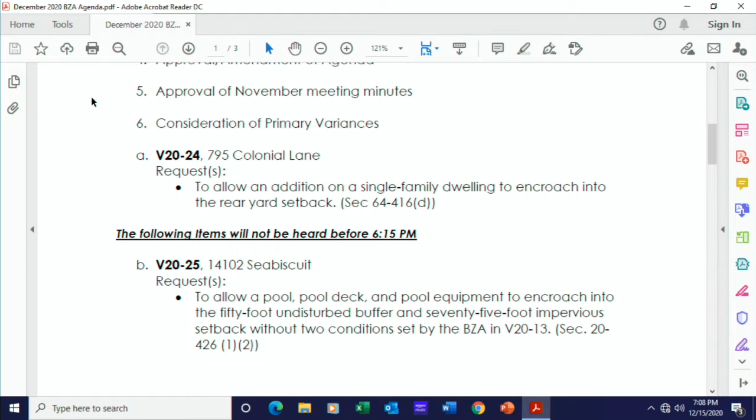The applicant is proposing an addition to the existing house that would encroach the rear setback as shown in Exhibit B. The house is sitting on the highest level of the lot. Moreover, the property is sloped and wooded on both sides. Therefore, the applicant is requesting a variance to encroach into rear yard setback.

Design Review Board met on November 3rd, 2020 and had the following comments: recommend to approve the variance.

Staff response, part one. The relief would not offend the spirit of the ordinance because the shape of this property has caused unusual setbacks. The rear setback could be equal to the side setback since it is technically on the side of the house, and the front is curved.

Part two. Because of the topography, the trees, and the previously approved setbacks, the property owner is facing this challenge. The strict application of the ordinance would create unnecessary hardship. Therefore, it is staff's opinion that relief shall be granted.

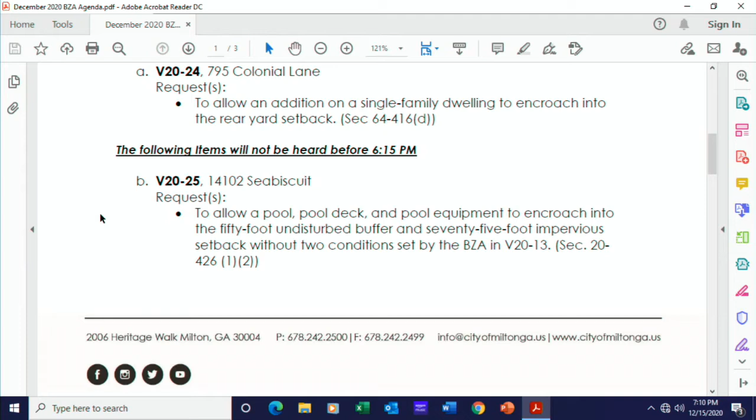Part three. Relief, if granted, would not cause substantial detriment to the public good because there is a sufficient buffer between the neighboring houses. Part four. No harm to public safety and health is likely because of the encroachment into the rear setback. Staff recommends approval of the variance request as shown on the site plan.

Are there any questions for staff?

I have one question clarifying this unusually shaped property. In the determination of front yard, side yard, and rear yard, as noted in the presentation, can you elaborate on how the legal interpretation has gotten us to this point versus what appears to be a side yard being considered as a rear yard?

Well, this plat was done and issued prior to the incorporation of the city, so we didn't have review of it. Just looking at it from a practical standpoint, it appears to be a triangular type lot.

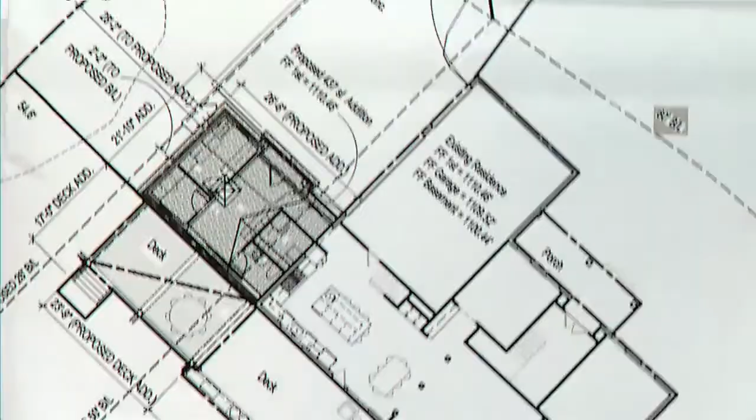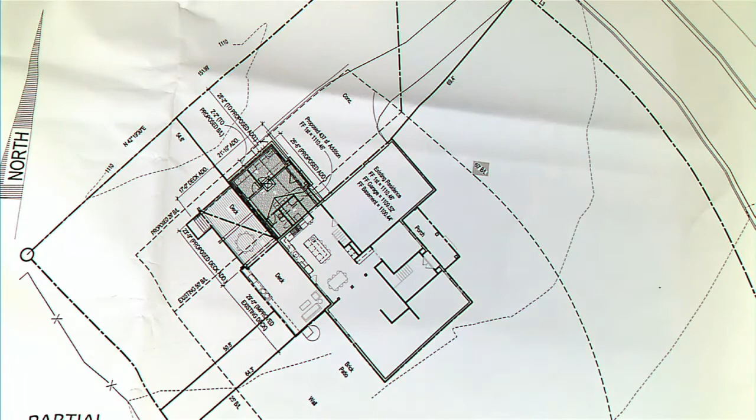Okay, so the shaded area would be the addition that you're looking at, and it also shows on there the existing 50-foot setback, and then the proposed 25 if we would determine this to be a side yard. So the addition would be within that 25-foot, outside of the 25-foot side yard. Correct.

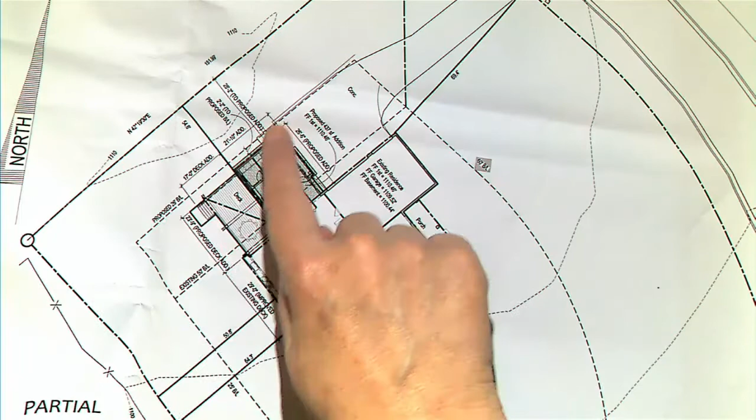Okay, and then can we also show the elevations in terms of what the structure is intended to look like? Front first. You might want to flip it, it's upside down to us.

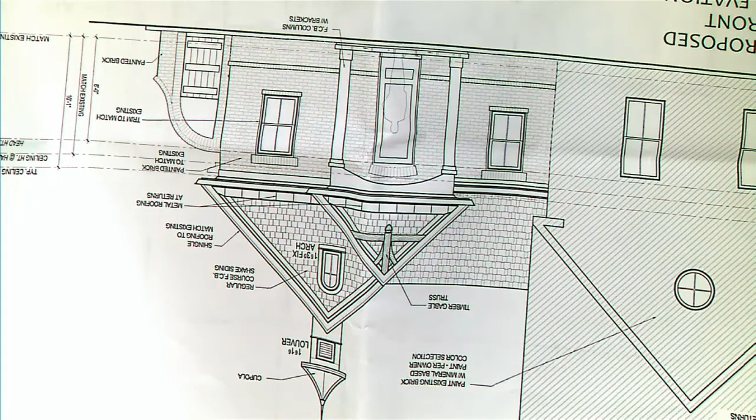Okay, so the addition is designed to match the existing house and look like it was contiguous to the original home. Correct.

Is there any concern with having a condition attached to this specific site plan as well as the elevation plans? Is this your final product that you're looking at? This is our final product. Okay.

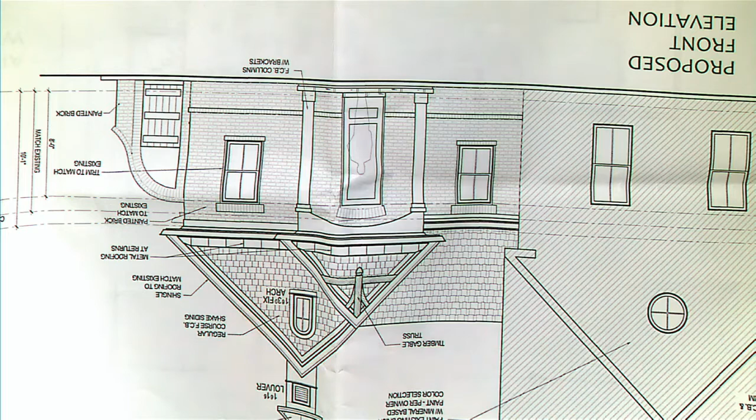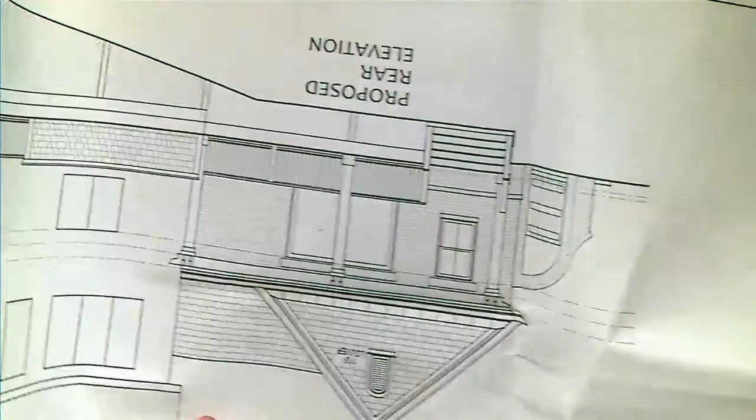And I think there's a side view too. Okay, and is there a side view as well, I believe?

Only for the neighbor's purpose. I think it's on A2. The right side is.

Robin, can you rotate those 180 degrees? 180 degrees.

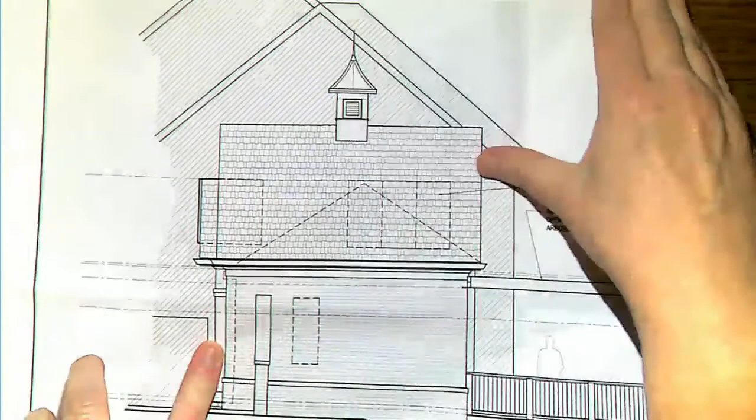Can you zoom just a little bit? So this would be the side view from the adjacent neighbor. Correct, although they wouldn't be able to see it because there's a bunch of trees.

Understood. Anything else you'd like to share regarding your application? Nope, that's it. Okay, so what we'll do is we'll move to a public comment period where folks can speak in favor or against this application, and you'll have a chance to make a closing comment. We may have additional questions.

You can go ahead and have a seat. If there's anyone online that's interested in speaking or here in person, for those online, if you're on Zoom, click the icon labeled Participants at the bottom of your screen, then click Raise Your Hand if you're interested in speaking. If there's anyone present, we'll have an equal amount of time for those speaking in favor or against. Is there anyone wishing to speak in favor, here or online?

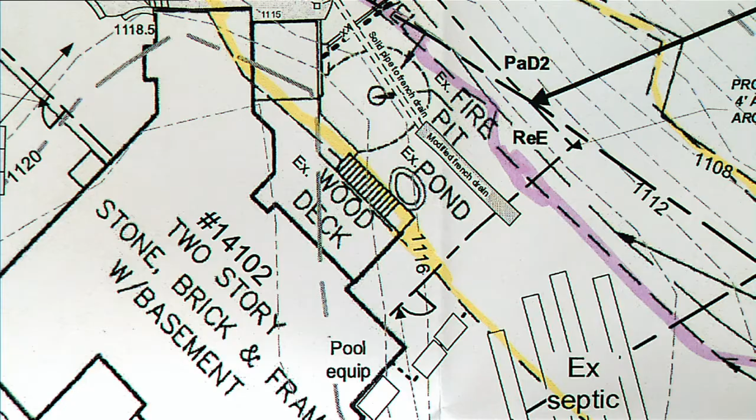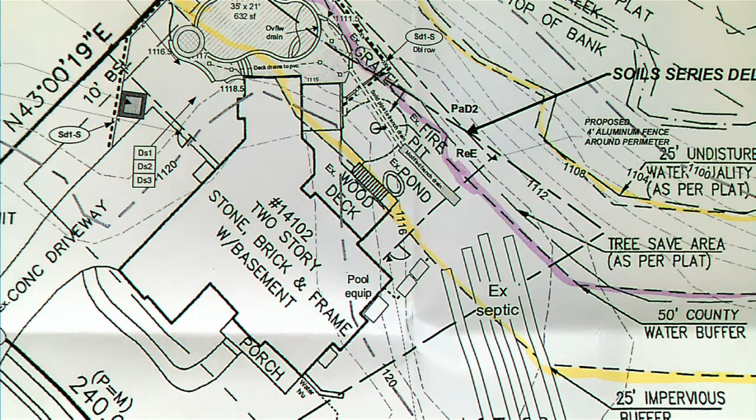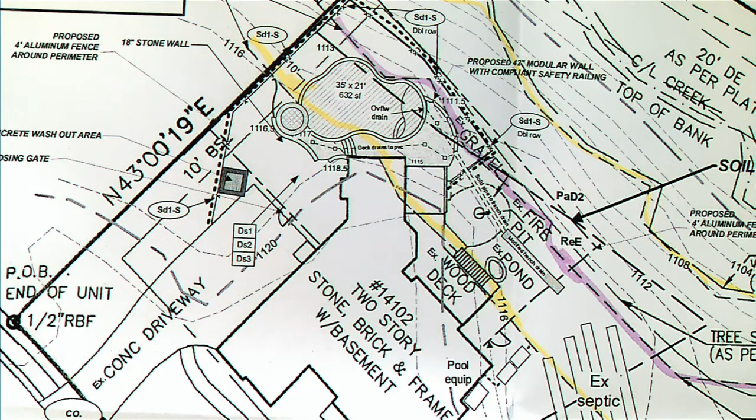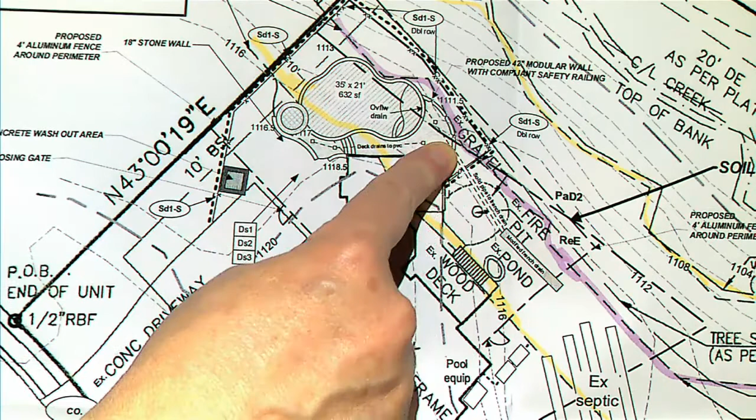We worked on an alternative solution to mitigate the water from the impervious pavers and the deck runoff in the pool. Rather than have the concerns that I had before with pervious pavers and the dry wells, we were able to put in a modified French drain to do the work of those two other stipulations. As long as you approve it, that's the solution I'd like to go with.

Understood. So the footprint of the pool and the pool deck hasn't changed. The mitigation option for any runoff, because you're abutting a stream, is what changed. Correct. The purple line shown on this drawing is the 50-foot buffer, which you're building up near, as you were originally. Correct.

Are there any questions for the applicant?

Do you have anything further to add? And before I move to public comment, you will have a closing opportunity if needed. Good, if you're good. Okay.

If you have a seat, see if there's any public that's interested in commenting.

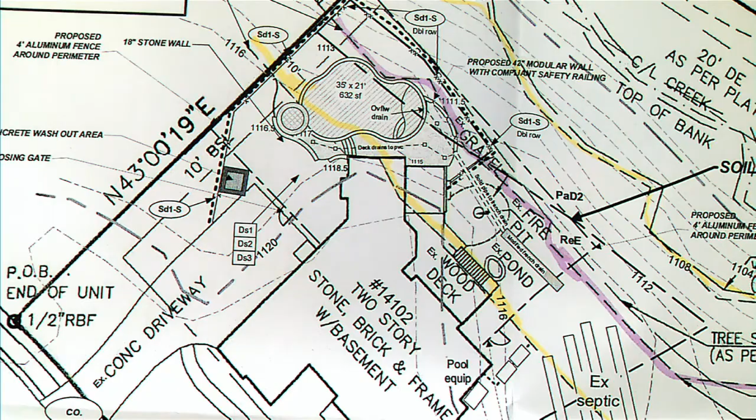Of course, if there's anyone here present that wishes to speak in favor, I will start with in favor.

Robin, do you have any interest online? Nope. Okay. Hearing and seeing no further interest in public comment for support of this application, is there anyone here wishing to speak in opposition or online?

Okay, hearing and seeing no interest in public comment for or against, Mr. Wilbrock, you have an opportunity to make a closing comment. Do we have any closing questions for the applicant?

I guess I would just like to get some further clarification on the pervious pavers. Why would we take that out of the conditions variance? Is that a question for staff or for the applicant?

I guess staff. Based upon the resubmittal and review by the plan review engineer, the proposed alternative basically compensates for both the dry well and the pervious pavers, or the grass between the pavers, because this mechanism will take any kind of pool water that comes over, as well as rain and drainage.

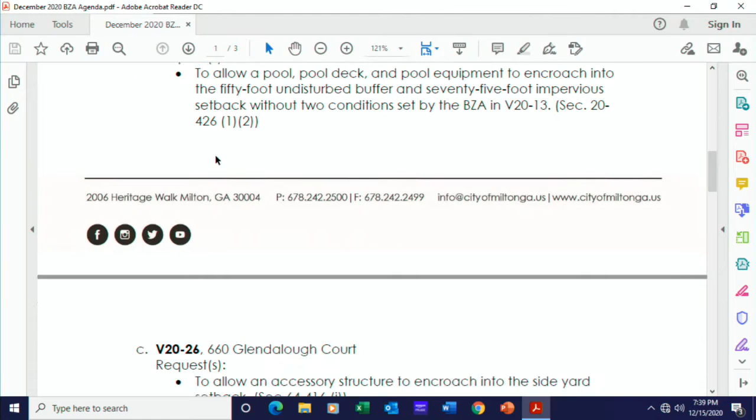The next item on our agenda is V20-26, 660 Glendalough Court. Please present. V20-26, 660 Glendalough Court requested variances to allow addition of an accessory structure to encroach into the side yard setback, section 64-416I.

The site is a 1.745 acre lot on the west side of Glendalough Court in the Enniskerry subdivision. This property is zoned AG1 and is located in the rural Milton Overlay District. The final plat for the property was approved in 1992.

As per section 64-416C1, a 25-foot side setback is shown for the lot.

On the north side of the subject is a piece of land that serves as the road frontage for the house located across the lake, which is not being utilized by that owner.

The applicant wants to build an accessory structure on the property to be used as a garage, as shown in Exhibit A. The existing driveway would be used to access the new two-car garage. However, the structure is encroaching into the north side setback by 10 feet. Therefore, the applicant is requesting a variance.

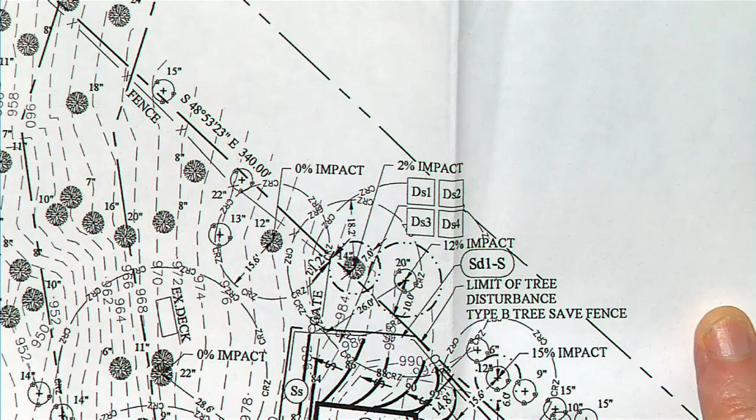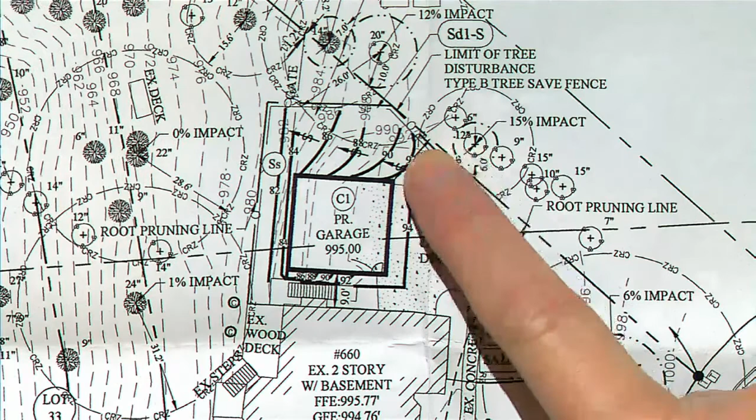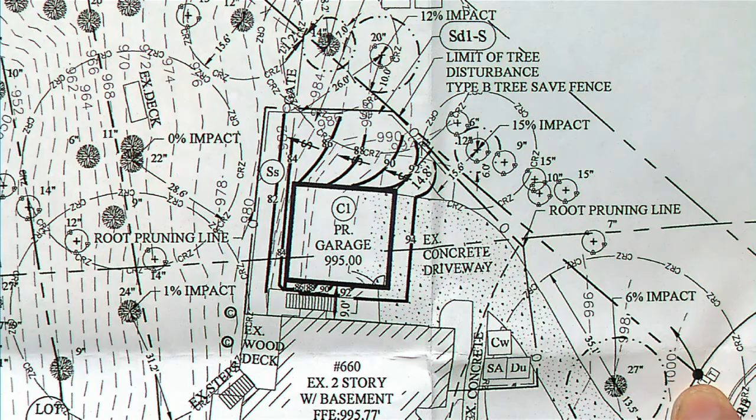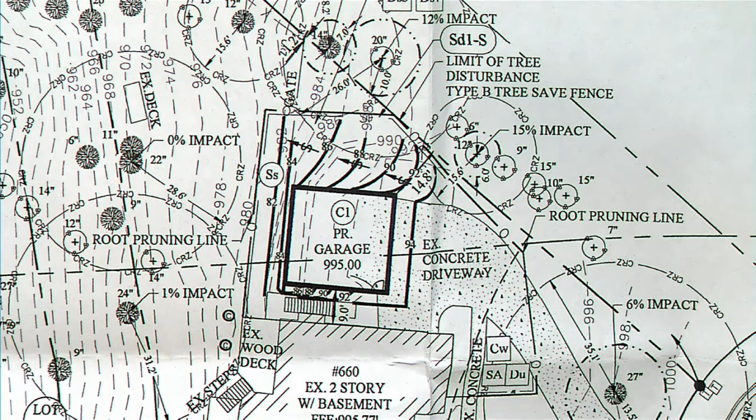I think, as we did with prior cases, we'll want to show some of the elevations of this project as well. I'd ask the applicant to please come forward, state your name and address for the record.

Estes Barker, 660 Glendalough Court, and Jennifer Barker. What can you share about your project, what you're looking to do?

We're wanting to build a garage, and due to the pie-shaped nature of our lot and the severe slope going down to the lake, we need the variance because of the strip of land between our two properties. If that strip of land was split evenly, or even two-thirds to our neighbor and one-third to us, we wouldn't need a variance, but it's there.

The owner of the strip is here tonight in favor of our project. We've tried to set it back as far as we can. We're already incurring quite a bit of additional expense because of the slope.

So it's going to require that much more support structure. It looks like you've got a partial basement on the backside, half the garage, because of the topography. You're going to utilize that as storage? Yeah, lawnmower, that kind of thing. There are quite a few elevations, which I think Robin's going to start showing here next.

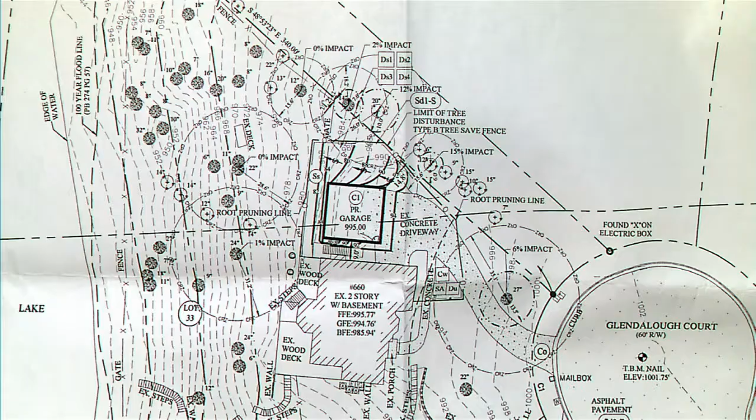The clarification regarding the elevations, I think we can put those up. Thank you for having these provided for us. Do the building materials and the design match the existing house? Correct.

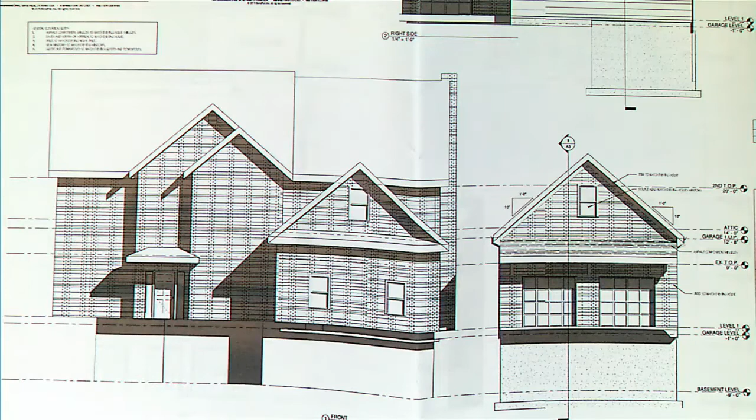I'd ask you to address the use of this addition. You mentioned it as a garage. There's no living heated space, just a garage. Well, you're allowed to have heated space, just not allowed to have living space in terms of an accessory.

It looks like you have a lift going in here, some sort of hobby. Well, I do have an antique Jeep I need to store. Not a Mustang? That's what I see pictured here. We have one of those, but it's not at our house. I'm a car guy, so - a '66 convertible. All right.

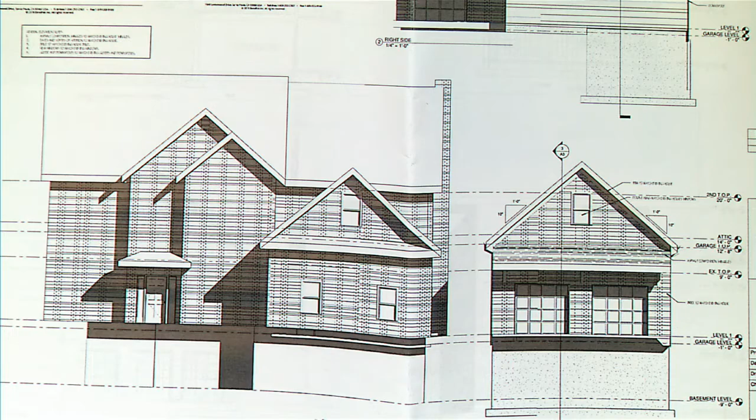Does anyone else have questions for the applicant regarding their project? Can you clarify if the two structures are going to be connected by a breezeway, or are they completely separate? Separate, no connection.

And it looks like you're repurposing part of your existing garage for personal expansion of the home? Both of our mothers have dementia, so at some point, one of them, if not both, will be with us.

Robin, do we have the letter of support, or is this your adjacent neighbor? Neighbor can come up to speak. Are they planning on coming to speak? Okay, then that's fine. I'll call public comment here in a minute. So you've seen the process. I'll ask for public comment. You'll have a chance to make a closing comment, and we may have final questions for you. So with that, you can have a seat for now.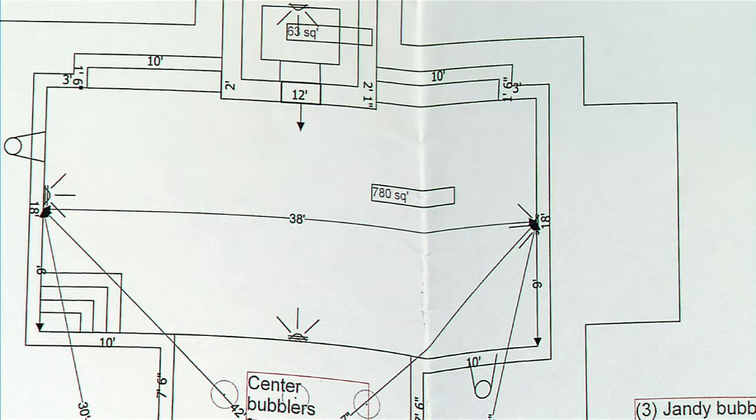In terms of the numbers and percentages, which is probably the most important part we have to figure out: the current home occupies 19.2%. The initial proposal submitted to the city, before the panel here, was 25.22%. After we met with the city, we trimmed it down to 23.6%. That's the plan in front of you now. My understanding of the laws in Milton is that houses fronting major roads like Providence were reduced from 25% to 20%.

It went the opposite way. Everybody was under the 20% rule when it was initially adopted, and then a year and a half or so later, we amended the rules so any private roads were allowed 25%. So everybody got moved up except if you were abutting a major road.

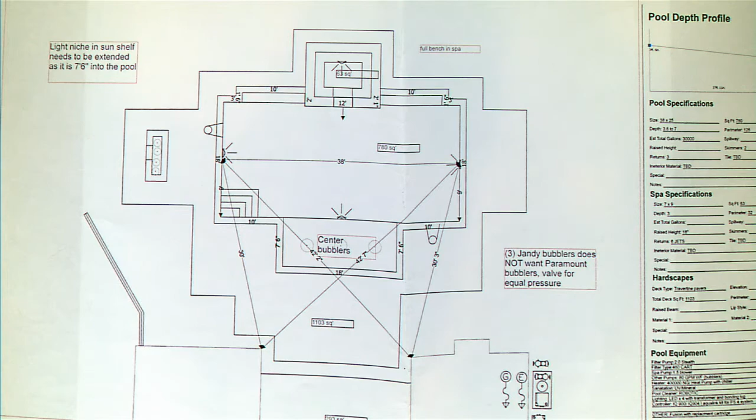We purchased our house in December of 2017. It came with a plan that I believe, or was explained to me, predated this bump up. So there's an equitable issue, in that we bought the house understanding there would be a pool and all of that, which was approved by the city of Milton. That's just the context.

In terms of the actual arguments we're making, respectfully reading through some of the city's arguments, I believe they're more conclusory and not specific to our particular piece of property. It just says because it's over 20%, it shouldn't be allowed. But if you look at the actual topography of the yard, it makes sense why it doesn't cause a public detriment. To the extent there could be runoff issues, the property owners that could be affected have consented, and that runoff would go to property that's unbuildable anyway — tree-lined property that's not buildable.

So the topography of our backyard - and it's not included in the plan, correct - someone from the city of Milton went, I hope they did, because we had someone wandering around back there, to look at the backyard. It's flat, and then it goes downhill towards the unbuildable areas that the property owners have consented to. So it doesn't break towards Providence Road, so to speak.

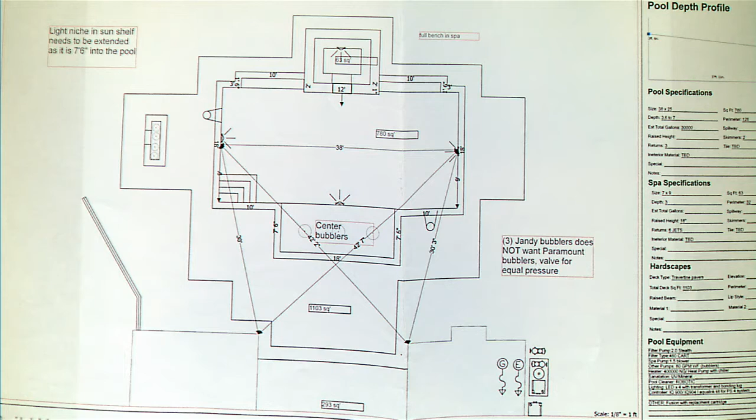Nothing in our plans is going to change that, so I don't think there's any detriment to the public good. I think us reducing the footprint shows that we get it, that we're trying to be good folks and operate in good faith. Also, regarding runoff and water, no trees would be uprooted in our plan. In fact, it's more likely that trees would be planted, and there would be more beautification of a yard that's right now just flat. So that also supports the plan being a good idea.

It's worth noting that we're talking about 23.6%, and the cutoff is 20%, but we're also talking about building a pool. I know Milton doesn't look at it this way, but at least some runoff could be accounted for by the fact that we're building a pool. My understanding is some cities allow some sort of set-off if there's a pool. So I think that's a relevant factor. Bottom line: I think we've tried to show good faith, the way the yard sits doesn't pose a public risk, and we have consent of all our neighbors.

So a couple of questions come to mind. One, you mentioned you bought the home in December of 2017, and you had some plans that would have indicated a pool was reasonably intended for this property. Do you have any documentation on that?

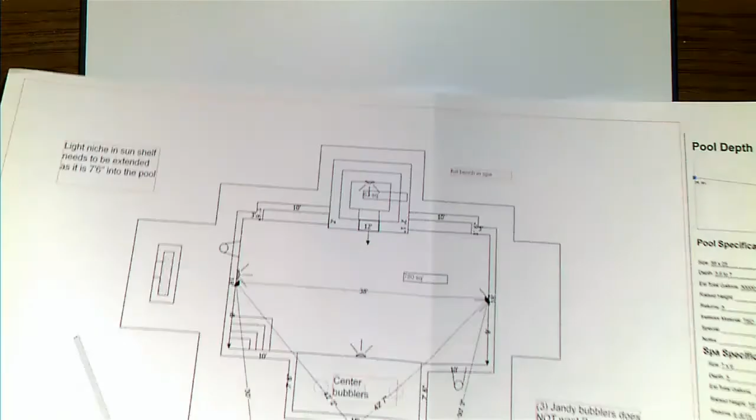The second question I have is regarding this home being on septic. It looks like we don't have the drawing or site plan up, but it looks like your primary septic field from Providence Road is off to the right of the home. Do you happen to know where your reserve septic field is?

I do not. That's something to be considerate of in a septic world - if there were to be a failure with your primary field, you'd move to a reserve field. If you built a pool in the reserve field, you wouldn't have that available to you.

I will tell you my understanding, and it's just my understanding, is that it flows into the back corner of the property, which is that downhill slope we have in the picture. But that's just my understanding.

I can see the topography does drop to the back rear, but my question is more specific to understanding where the county - is it the Board of Health that manages that? Yes, it's Fulton County Public Health. So that's something to get an understanding of before you place a pool, especially given you're on septic. It's also one of the considerations in not overbuilding a particular piece of property.

So those were my two questions. Are there any others? Yeah, you had mentioned that prior to meeting with DRB, you were at 25.22% coverage, and you were able to reduce it to 23.6%. Can you highlight some of the revisions you took on to make that possible? We cut a foot off the entire plan, the perimeter of the plan.

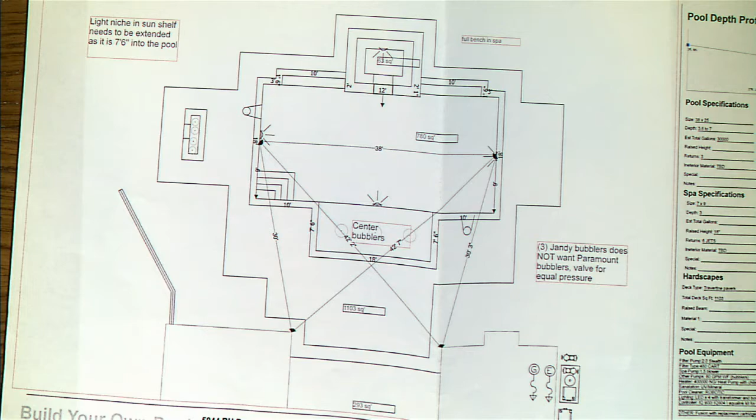And the deck you're presenting here, is it pervious or impervious? Some people - our builder calls it pervious pavers because it's not cement. Based on Milton City standards, it's considered impervious because you consider impervious anything over 4 inches, I believe. But in a lot of places it's considered pervious because we're not permanently cementing it - water can go in between the pavers.

Can staff comment on that? Were you aware of that as part of the submission? They have never submitted proper drawings, they just have conceptual drawings. Okay, which is what was shown earlier.

It's travertine, it says travertine pavers. Yeah, pavers.

Would that change the calculations of pervious impact? So basically, consulting with Bob, he's considering that if you have a 12 by 12 paver, and then you have a 4-inch strip of grass, and then the next paver along - we have some examples in one of the other cases. We would consider that as contributing to being 100% pervious, in the sense that once it runs off the paver, it goes onto the grass rather than everything being contained within that area. So if 100% of their deck was made out of that material and grass, we wouldn't count that against them as impervious.

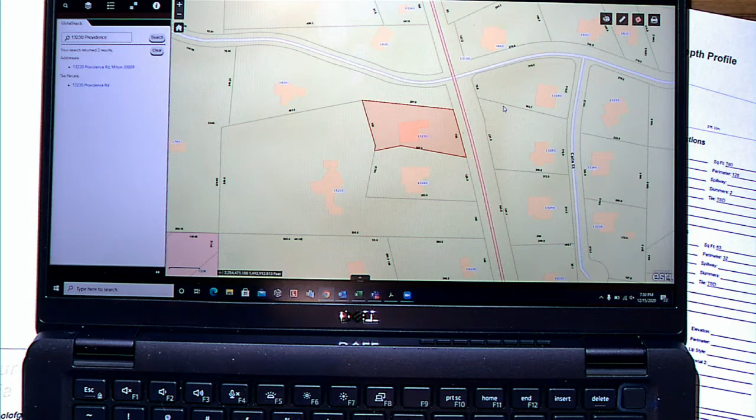Is that just public? I've never heard of that, do I just pull that from somewhere? Your pool contractor should be aware that there's a secondary, and since this is such a recent built property it should have access to that. The septic plan, the health department has their records, but at least you have the benefit of it not being a very old build. If it's a public document, that's fine. Okay, that's all the questions I have.

Do you have any closing comments? If you can have a seat then. So I'll make note that the public comment is closed, and I'll open the floor for a motion and a second.

I'll make a motion to deny petition number V2028, 13230 Providence Road, to allow the lot coverage for an AG1 zone property that fronts a public street to increase from 20% to 25%. Is there a second? Hearing no second on that, I'll open the floor again for a motion and a second.

I'd make a motion to defer until the next scheduled Board of Zoning meeting in January of 2021, to allow time for the applicant to pursue some additional mitigation as well as additional details with staff for the items we've expounded on in tonight's meeting. Second. Is there any discussion?

I just think it's courteous to the applicant. This is their home, their application, and the first time they're doing a pool. I would hope they take the guidance to work with staff who are very capable of helping with a number of their issues. I'm not saying it leads to approval, but there are outstanding questions that need to be addressed before we could even consider an approval.

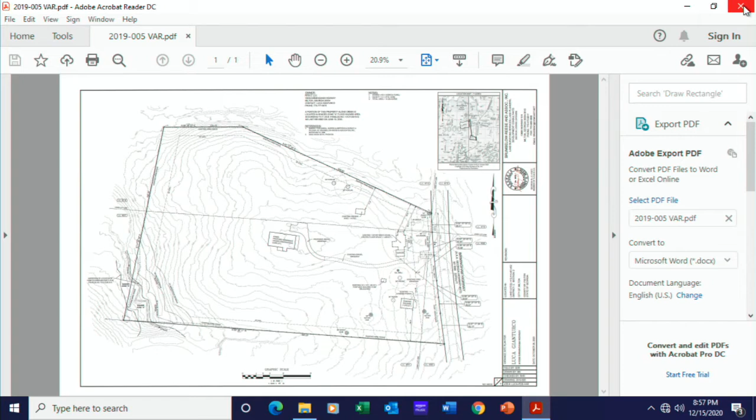Okay, so you need to include that in this? Let me explain - that's why I asked him to clarify the date of existence. The Fulton County zoning ordinance originally started in 1948, 1949, and was recodified in 1955. So this building was built prior to any zoning in the county. Mr. Reese and I had discussions about this structure even when they came in for permitting for the new residence. Based on the age of the structure - built prior to zoning - and its significance to the community, it is, in staff's opinion, grandfathered in, non-conforming.

And its primary use is not residential. It is not residential use. So it qualifies as an accessory structure, correct? And it's grandfathered in on anything else, is that correct? I've had other barn.

I don't know which one you're speaking of, but in this case, I don't know when it was built. It's predating any ordinances - this is historical in that regard. I don't know that we've ever had this situation arise. In staff's opinion, because the structure predates any ordinances, it is grandfathered, and therefore does not need a variance to be conforming. Correct.

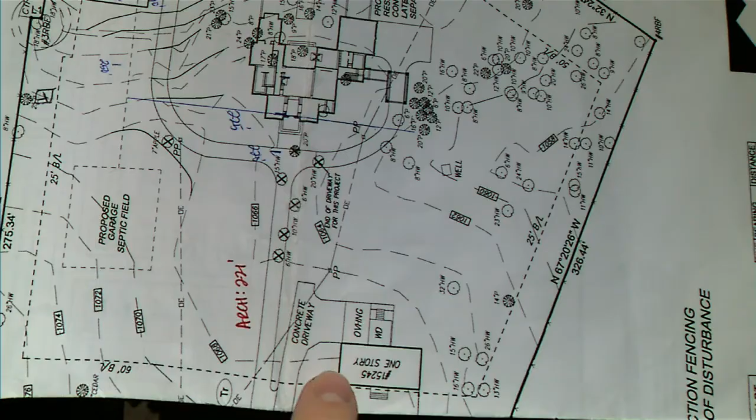After this you would come in for a combination plat. Exactly, yeah, this is going to be when we come in for a combination. So it's further back off the street. Okay. Yeah, so this is a little bit clearer, I think this is a copy. Where their home now is...

Just being cognizant of the time frames allotted here, you've got a couple more minutes to wrap up, before the city will have a chance for rebuttal.

Yeah, absolutely, I think it's pretty straightforward, I've stated the facts, it's not much more complicated than that. I gave you the time periods between the spring: March is when the property was acquired, May 25th was the deadline to take the home down, it came down late April, May, some point. The structure in back of the property still stands, we got conditional approval to take it down based on tonight's decision, DRB passed that. So I don't think I have anything else to add, just that there was no ill intent, it was a situation they weren't quite sure how to handle, knew the meetings weren't occurring. We can provide more information if necessary, but I hope we find tonight that it's not necessary and that we can unanimously approve this.

The other thing I'll point out is that we went through the explanation at the DRB about the property as well, and they understood the vision of it, approved it, and recommended that it be approved with this board. So I hope you'll take that into consideration. And one final thing, Mr. Roberts also pointed out that he wanted to be on record that he approved this and understood that. I don't know where that goes on record, but I think it definitely helps us as well.

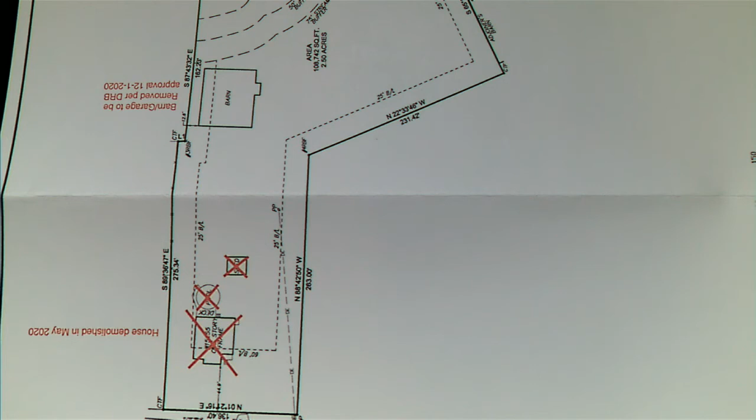Okay, it's on record because this is all recorded. Good, yeah, all right, thank you. So with that, now the city has the opportunity for a rebuttal period of up to 5 minutes. Is there any rebuttal to what you heard tonight? No, there's not.

Each party has an opportunity for a closing statement of up to 5 minutes. Would the city attorney please help me determine which order the closing statements would go in? The city goes first if they choose.

Based upon the situation of the insurance company asking the owner to resolve the issue of not being able to insure the property or that piece of the structure, it's staff's opinion that the owner was doing their due diligence, looking out for the safety and welfare of not only themselves but the community. Also, the applicant has been working with staff to try to resolve the issue and is doing the best they can to follow the rules and regulations since that time.

Is that you concluded? Yes. Okay, if the applicant, you have an opportunity to make any closing comments if you care, up to 5 minutes. I won't take up 5.